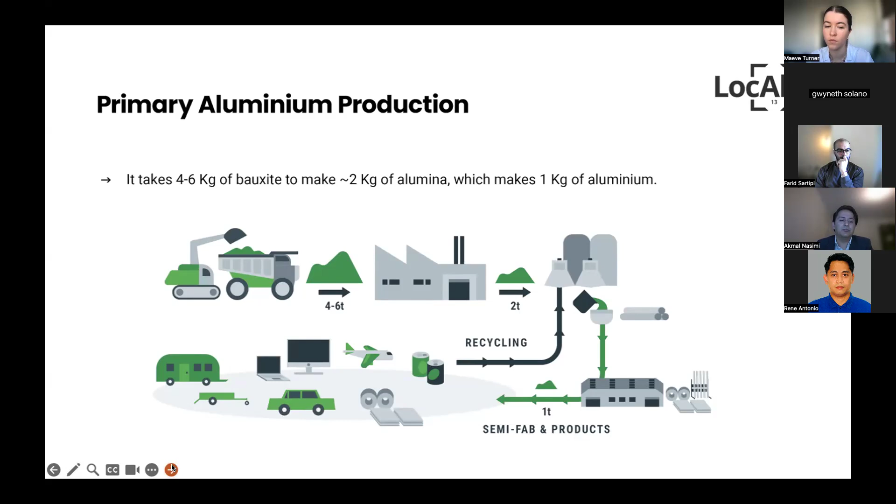Aluminium smelters use an electrolytic process to extract aluminium metals from alumina. It takes about 4 to 6 kilograms of bauxite to make 2 kilograms of alumina, which makes 1 kilogram of aluminium. Most of the energy required is at the smelters process.

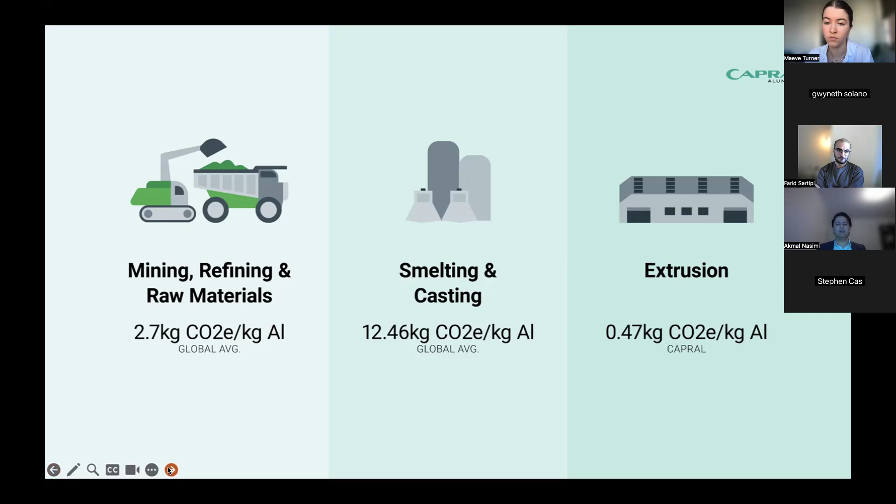In fact, Australian smelters use about 10% of the Australian electricity grid. We only have 4 smelters in Australia, and we are already using 10% of the grid. That means the rest of the cities, factories, everywhere else around Australia only use 90% of the electricity grid. So it's a very, very heavy process when it comes to electricity usage.

There are currently 3 options for aluminium extruded here in Australia: standard extrusions, global average, 12.46 kilograms; LocAl Green, which we're offering as a standard into our building systems market at no extra cost, 8 kilograms; and LocAl Super Green, offered at 4 kilograms. Only until recently the global average was hovering around 16 kilograms.

That 12.46 figure is the result of recent efforts of everyone around the world working towards a greener aluminium product, and that's dropped from 16 to 12 already. So we're heading in the right direction, and Capral obviously is part of that.

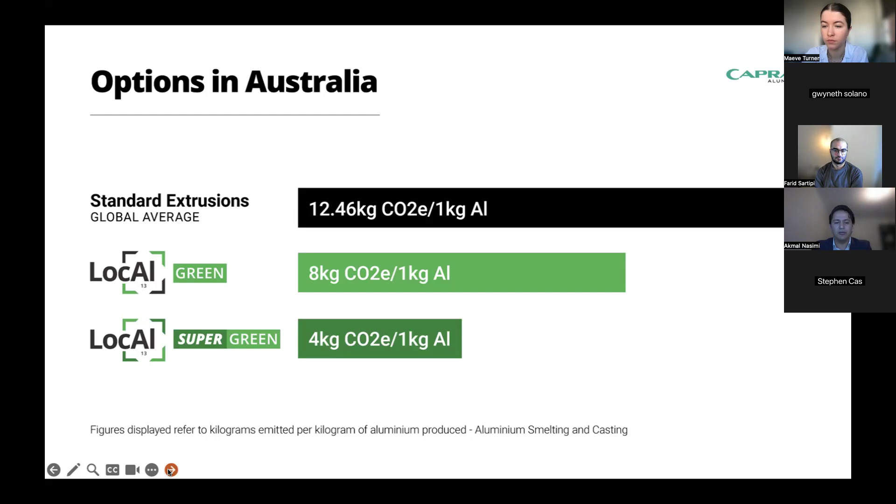Why is it important? We all know aluminium is a critical enabler in a carbon-constrained future. It's got properties of strength, ductility, and lightweightness. It supports development—most of the projects I work with architects on all require some sort of aluminium.

If it's not in the glazing portions, it will be within the building. But if you look at the top 3 products when it comes to carbon content or CO2e, aluminium tops that list by quite a lot. Steel, PVC, everything else is a lot lower.

So it is important for us to ensure we make a move in the right direction and work towards a greener future, I guess. So let's see what can be done about it.

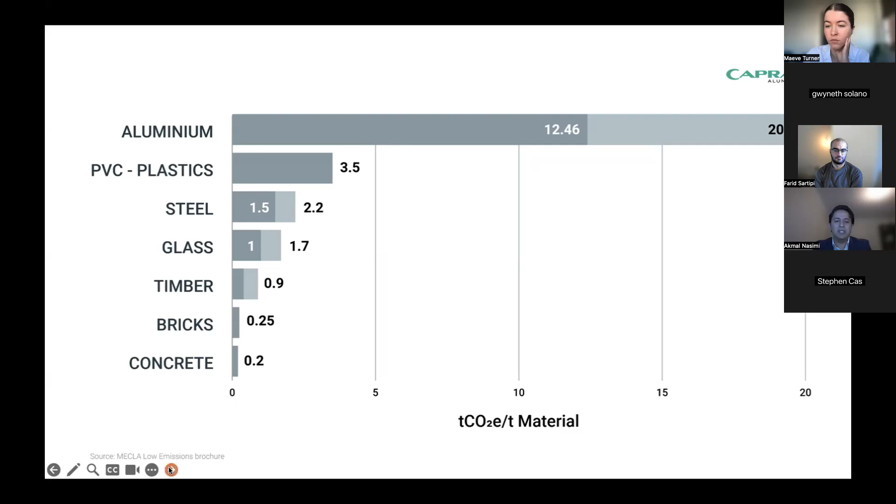So the new release product into the market is still a little slow for people to understand exactly how that's reduced. There's certain worries that the product will not have the same qualities. As mentioned before, and you will see in the next slide, a little short video, the product itself, the strength and everything is still exactly the same. It's the process that reduces that carbon content.

I'll let you watch this little short video and then we'll go into a little bit more detail.

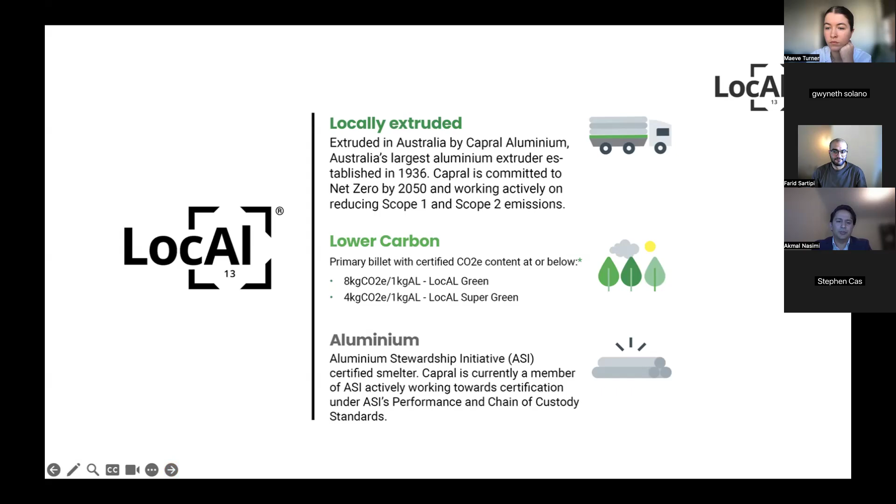If we look at the next slide, when you choose LocAl, you are making a cleaner, greener choice for the future. But as I mentioned before, how do you know that claim that we are providing 8 kilograms and 4 kilograms is true? That's where ASI jumps in, Maeve.

If you could just jump onto the... So Aluminium Stewardship Initiative and Chain of Custody is a very important part of this brand. Basically, ASI drives responsible production, sourcing, and stewardship into the global aluminium value chain. ASI certification provides a whole of supply chain platform for the responsible sourcing of aluminium.

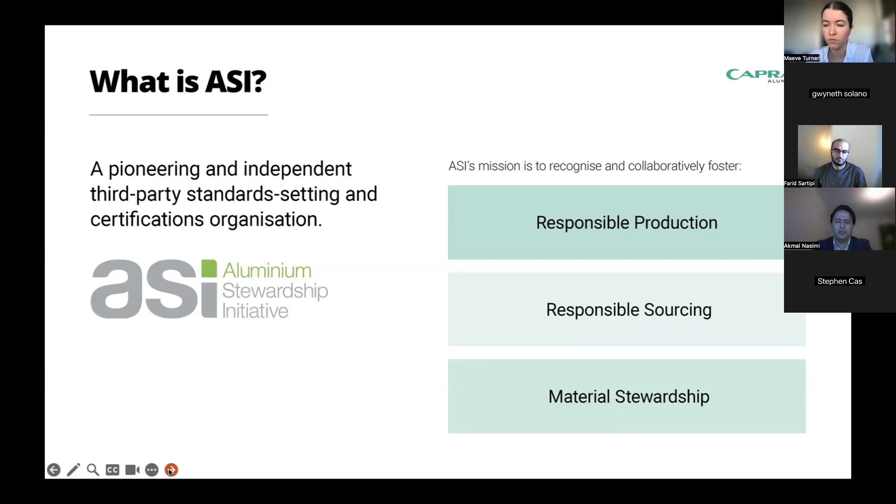I'll go through each one of those separately, but within ASI, you're pioneering independent third-party standards responsible for production, sourcing, and material stewardship. It's easy to state carbon content values for a product, but it needs to be verified by someone independent. And the ASI initiative is all around the world, and organizations can go through this process.

So there's two parts to it. ASI certified performance. This performance sets standards, practices for sustainability and human rights principles to be applied by companies. And there's ASI chain of custody, where every company or every part of the process is linked, and if a factory is not part of that ASI chain, then the final product falls out of the LocAl brand or low carbon brand that could be offered.

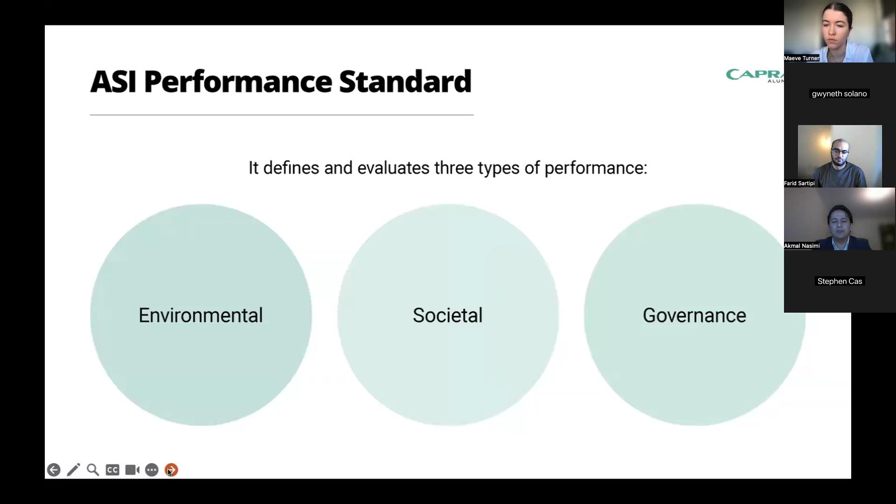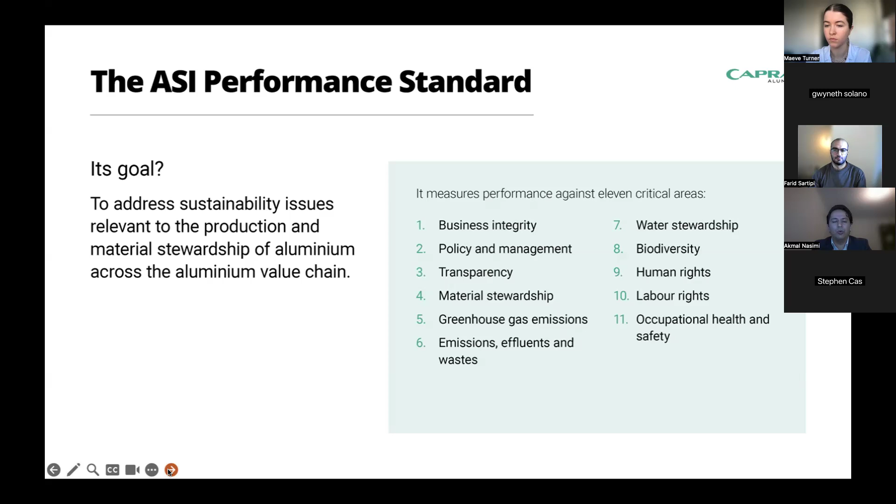ASI performance standards define the environmental, societal, governance side of things. So if we look at the next slide, the goal is to address sustainability issues relevant to the production. You're looking at everything from business integrity, policy management, emissions, water stewardship, human rights, labor rights. All of that is monitored by the performance standard side of things. So this body comes within and makes sure that at every stage of the production process, you're meeting those requirements.

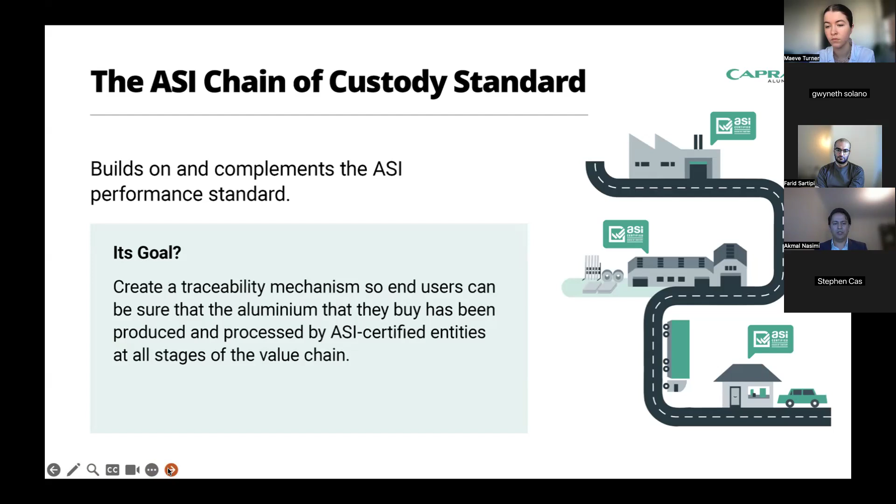If we are purchasing our billets as ASI certified, we as Capral need to ensure we're meeting the ASI requirements, as mentioned in the previous slide, to keep our ASI certification so that when we are providing the material to fabricators into the market, and they are using it on building sites and stuff, they can claim ASI if they are also signed off and ASI certified. If at any point we lose our ASI certification, obviously they will not have that. So it's very important for the link to stay connected.

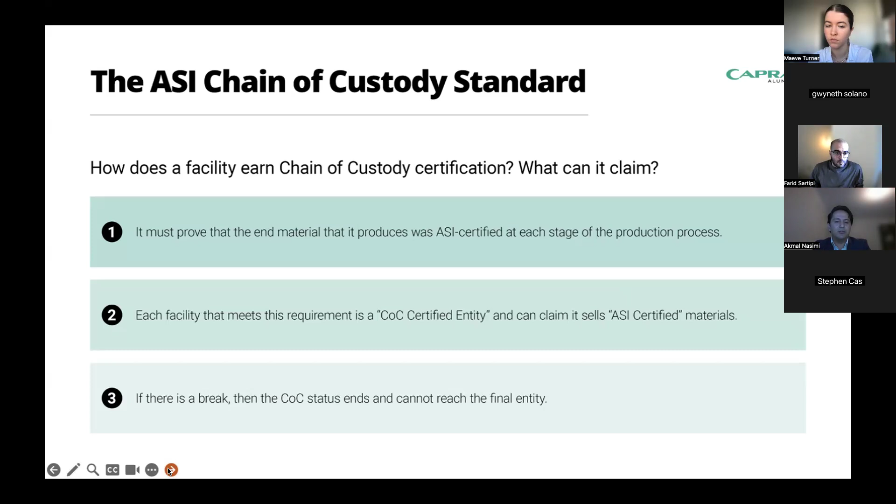So how does a facility earn the chain of custody certification? It must prove that the end materials it produces was ASI certified at each stage of the production process. Each facility that meets this requirement is a COC certified entity and can claim it sells ASI certified materials. If there's a break, then the COC status ends and cannot reach the final entity.

So the good thing is Capral has become part of that, and we can provide into the market low carbon, or low cal, green and super green ASI certified products. So always keep the ASI in mind. And as such, you're getting a much better, cleaner product for now in Australia nationally, at no extra cost basically. So that's about it for my presentation.

Hi, how's everyone doing? Good morning. I don't know if you guys are aware, I'm actually in New Zealand, not in Australia, so we have slightly different requirements when it comes to getting 3D printing off the ground. A little bit of quick background about myself: I'm originally from Egypt, I have a degree in architectural engineering. In Egypt, architecture is inside the Faculty of Engineering. I worked in Dubai, China, New Zealand, and the United States as a project manager, and recently as 3D printing consultant.

One of the major challenges that we have with the construction industry overall is that our productivity is very low. That's one of the reasons why I started to look into automation, because when I moved to New Zealand in 2015, I found that I'm facing the same problems overseas that I'm facing in New Zealand. No matter where you are, you have the same problems: labor and very tight programs, choking points in the supply chain, and we're doing the same stuff all over for the last 30 or 40 years. I have 3 graphs there.

The top one is done by The Economist and was based on research that was done by McKinsey and Co. You can see the productivity, global productivity of the construction industry around the world, is one of the lowest in the economy. So it's way lower than manufacturing and way lower than the average.

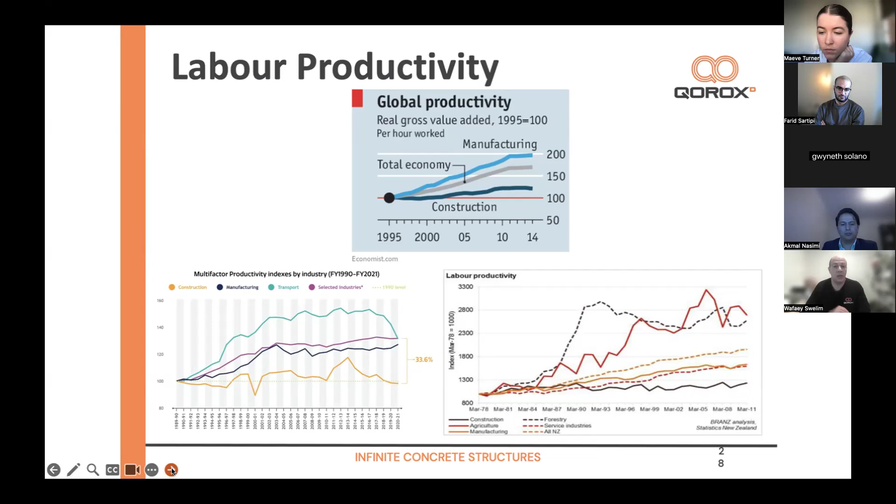So why are we like this? Because the construction industry is a very funny industry. When there's a boom, nobody has time for innovation, and when we're in a bust cycle, nobody has money for innovation.

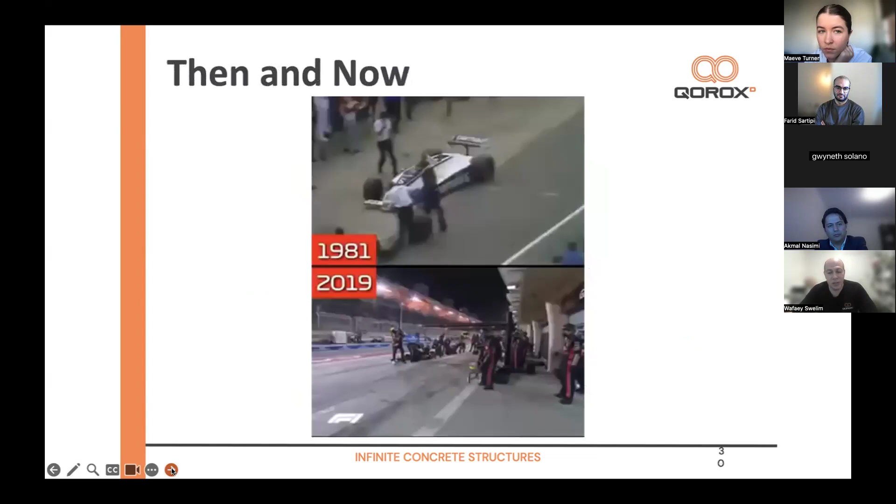This just shows people the difference that happened in Formula One from the 80s till now. It took under 2 seconds for a pit stop in 2019, comparing to 30 seconds in 1981. So the world moved quite a bit, but the construction industry is still stuck.

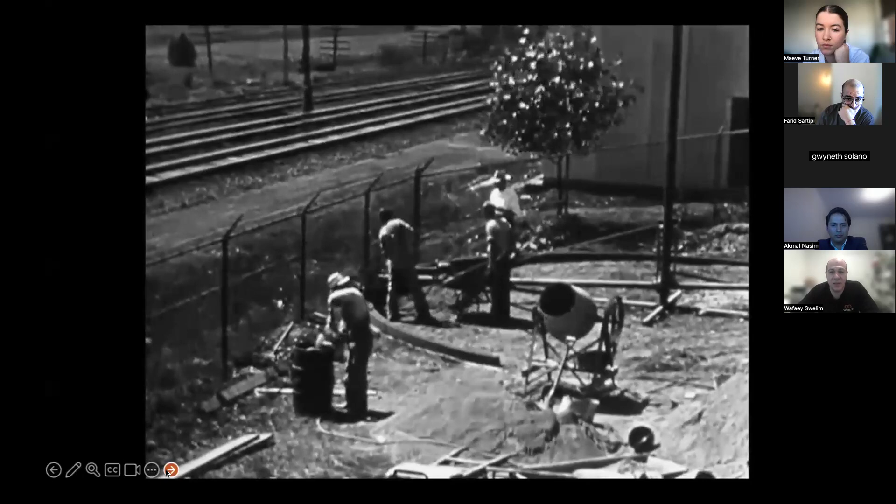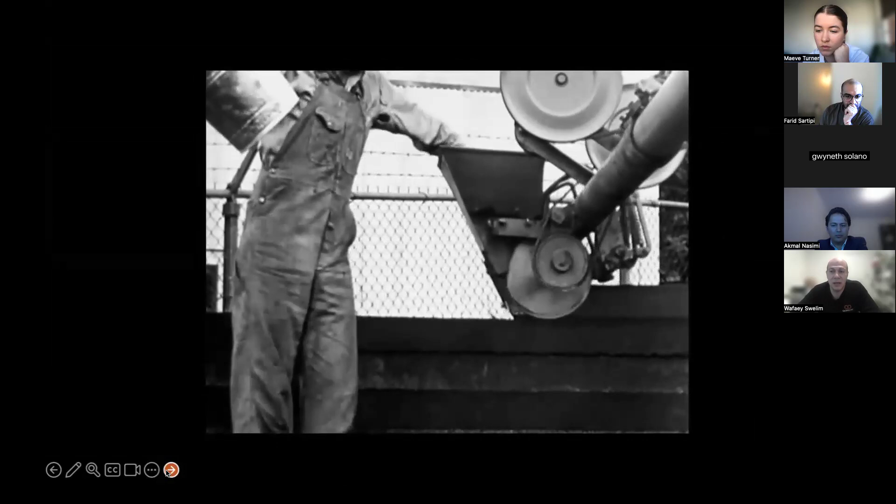This was a video of guys in 1936 using a curbing machine, putting layers on top of layers, doing on-site mixing, and they were building bunkers because they were worried that the Nazis would invade the United States. This was 1936, and all of the patents expired in 1965, so it's almost 100 years old.

But it took a very long gap, same as electric cars. 3D printed concrete, and concrete overall, has a bad reputation for being extremely harsh on the environment.

But we did the life cycle analysis comparing an actual house using 3D printing concrete, or using timber, or using lightweight steel frame. This was done at the University of Auckland, and it was peer reviewed in an Engineering Journal in Switzerland, and it's published. We found that over the life cycle, a 3D printed house is actually better than timber.

Predominantly timber is a lot better, but you will see at the end of life of timber, this is where it goes down quite badly, because what ends up happening is that the timber does not get recycled. Concrete gets crushed and used as drainage metal or used as aggregate again, but timber, all of it goes into landfill.

There's also other hidden advantages of low cost of ownership and heating and cooling the house. Concrete houses have 18 to 20% more efficiency because of the thermal mass that they have, and they require a lot less maintenance.

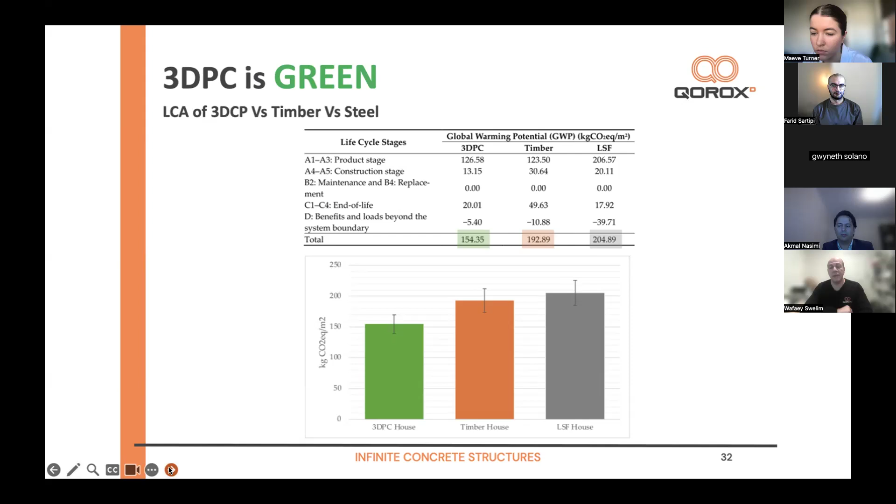But I know in New Zealand and Australia you'll not be allowed to do this because you need to have thermal breaks, and you will need construction joints every 6 to 8 meters depending where you are, and you also need to be covered because it doesn't rain in New Zealand or Australia - it never floods, it never rains, we're continuously very dry.

Now, I'm being sarcastic here, but it's very common in countries used to having canopies over the construction sites, especially in Europe and North America, because in winter it's so cold, so they're used to having canopies actually to heat up the construction site.

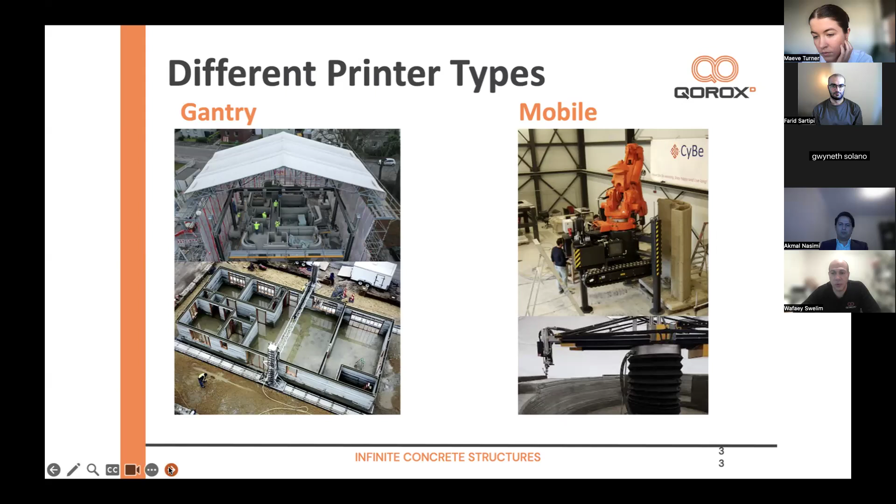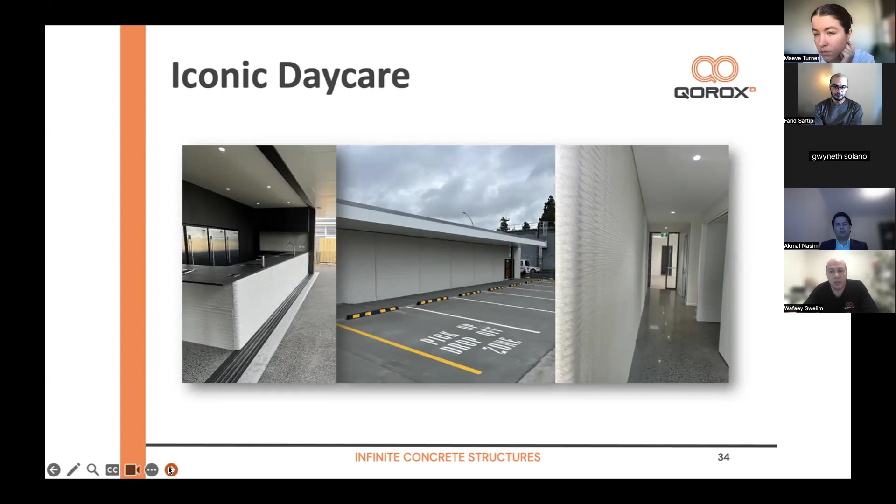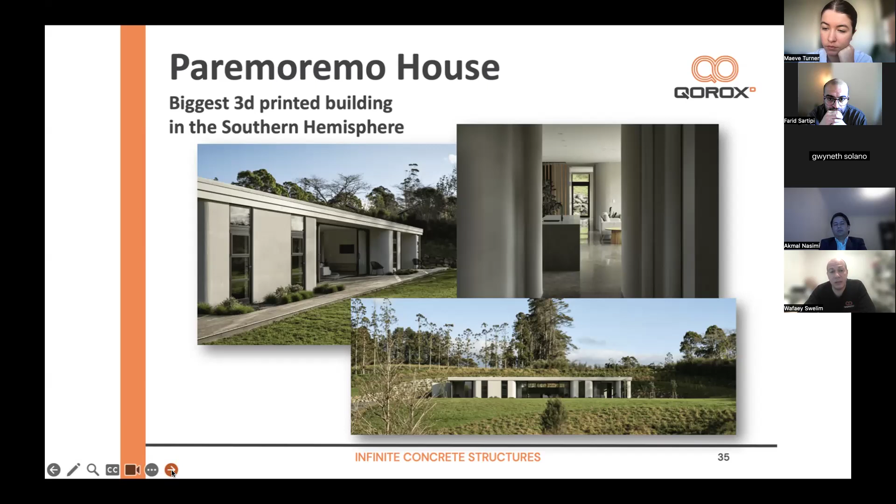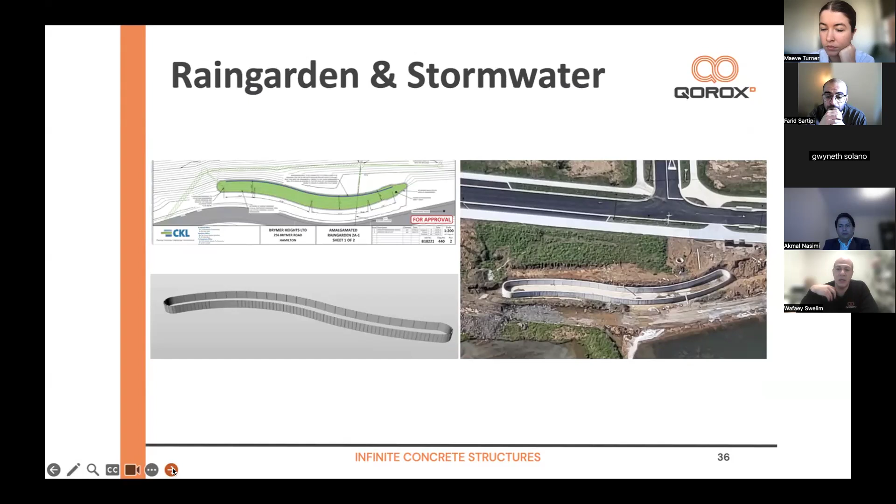Another thing is infrastructure. We printed this stormwater collection system. In New Zealand we use something called rain gardens, which is effectively this big snake-looking manhole. It retains the water before it goes to the wetlands, and it gets filled with media and plants, and the plants and media absorb the water. So you have less overflow going straight into the wetlands rather than just flooding it.

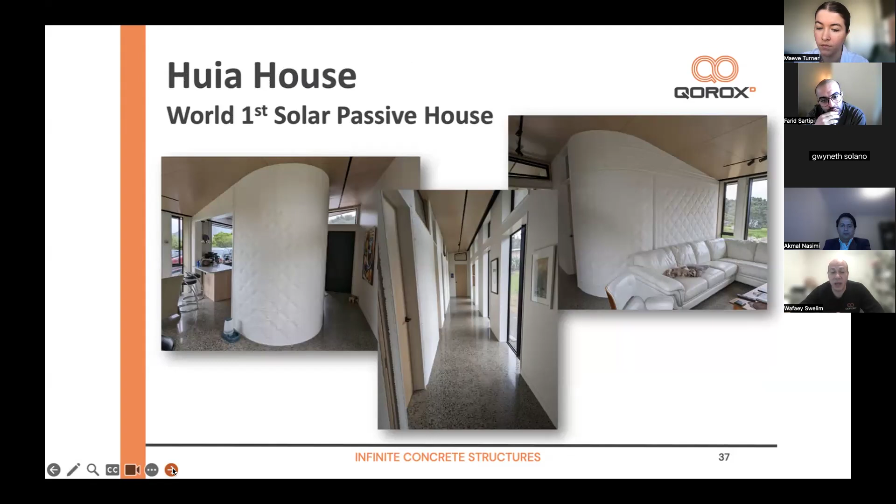This is a world-first solar passive house to have 3D printed walls. This was done for a client in Auckland, and Duncan Perth is the architect who worked on it. Initially it was designed as masonry or cement blocks, and it was replaced with 3D printed walls because you can get the texture. The client wanted something different, and this was really our first house that we had any walls in, in 2022. It was an easy swap.

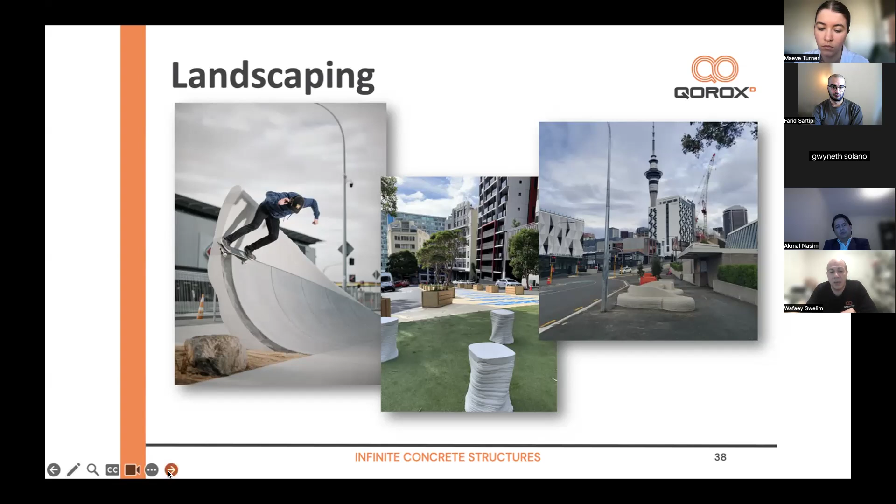Obviously you can do a lot of landscaping elements with it. We've done a skate park in Tauranga, and seats for Hamilton and Auckland Council. The 3D printers give us an opportunity to use recycled waste material as bulk fill inside the seats. The seats on the right have waste material embedded in them, same with the small seats in the middle, which were part of a street upgrade project. Each seat was printed in 2 minutes.

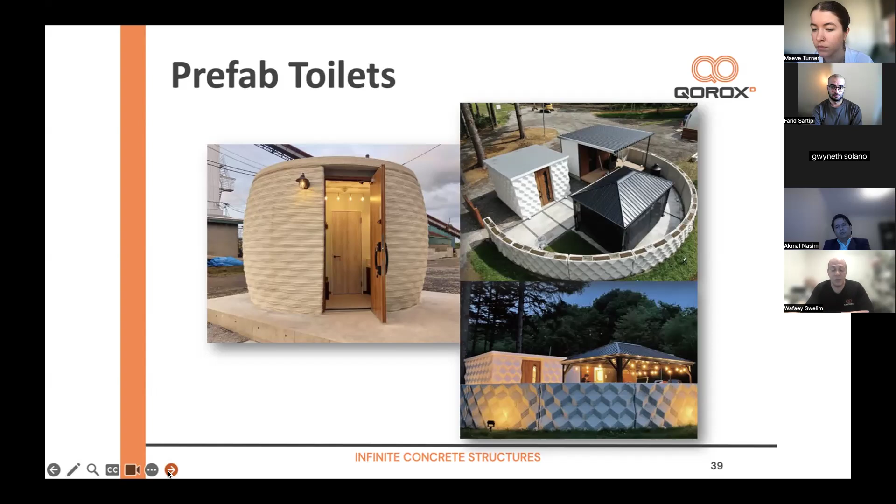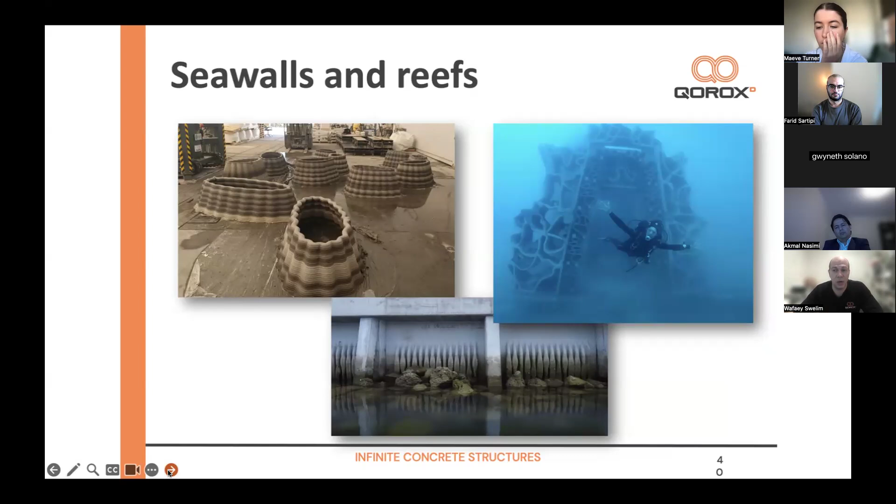I know Australia and New Zealand have a massive issue when it comes to sea levels and flooding overall.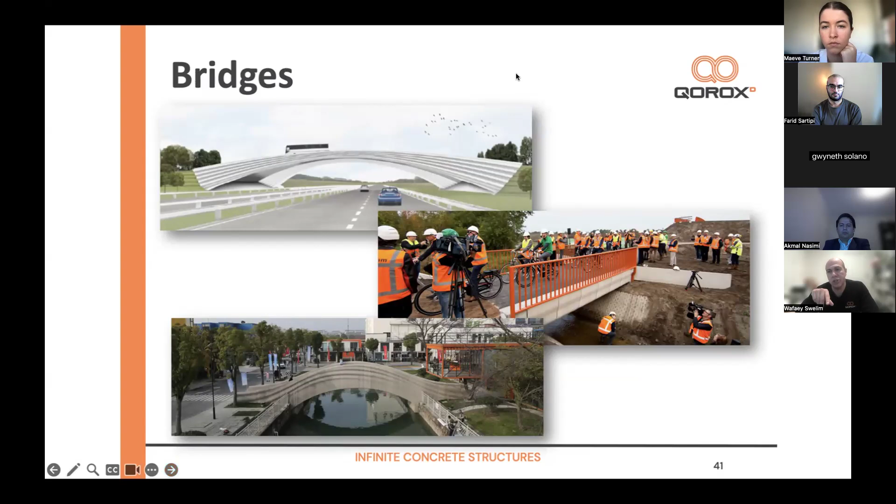Everything else you see here is not done in New Zealand. The one on top should be under construction in the Netherlands—a highway flyover, heavy duty. The one in the middle is in Eindhoven, a cycling lane, and the one at the bottom is in China. All three potentially use similar systems—the top two use post-tension cables, and the bottom one is effectively cladding.

That's it. There's a very quick video that will explain how the whole thing works. The company is called Qorox, and this is our demo video.

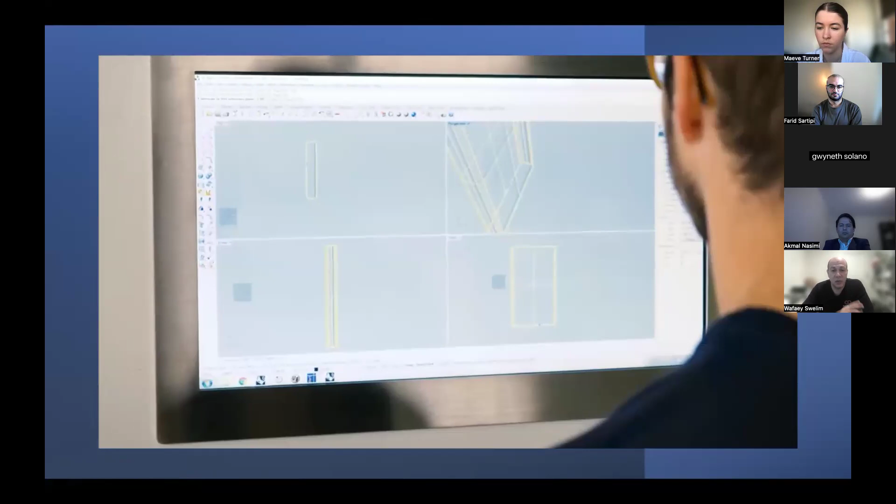The robot generally only needs 2 people to control it, and they don't need to be builders. They're effectively trained as machine operators, which helps us with the shortage in workforce.

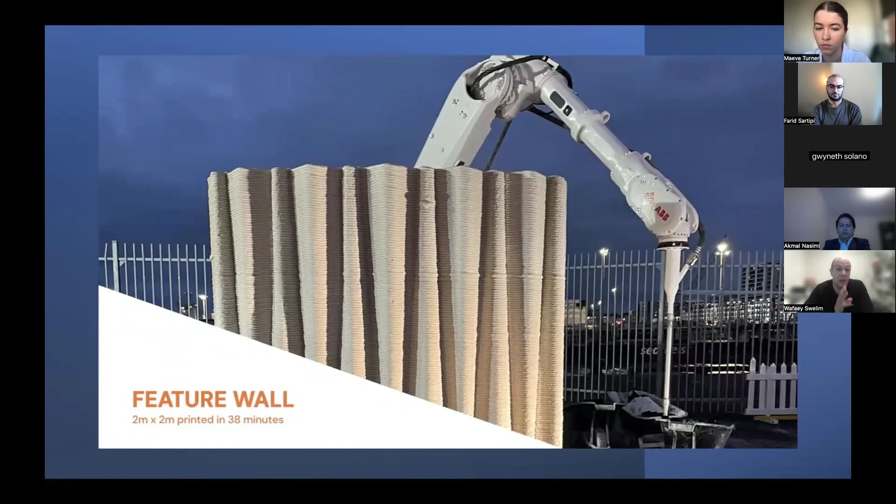There's an architecture website called ArchiPro. We took the robot to the viaduct in Auckland, where they have the America's Cup sheds, and we printed these walls.

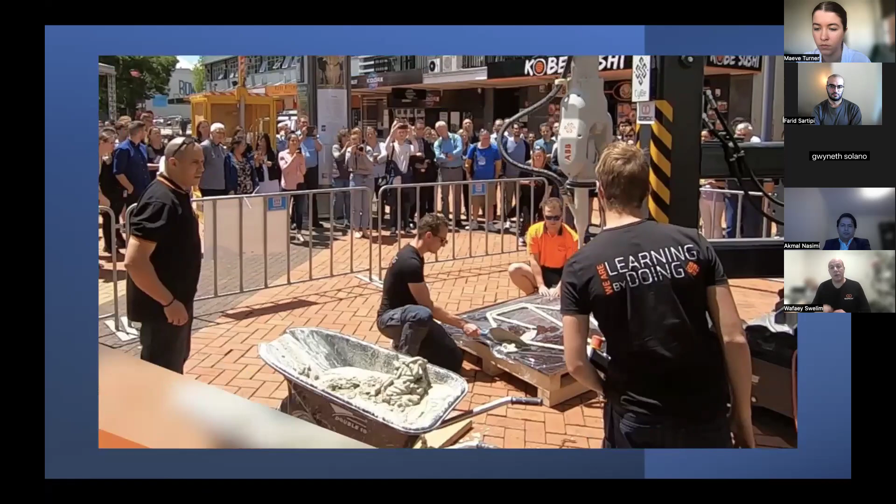When we got the robot in 2020, Hamilton Council was our first customer, and we printed seats for them in a public demonstration done in the middle of town. By using a honeycomb shape, we can use 80% less concrete, and right now they're sitting next to the river.

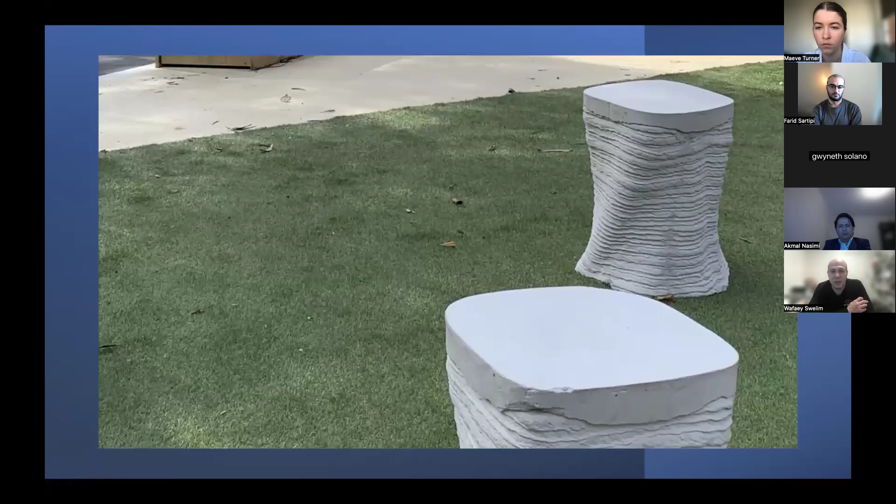And this is our first little wall that we ever did. It's not a big feat, but it just shows another use of the 3D printing. These were the seats that were printed, and right now they're sitting in a place called Emily Place in Auckland.

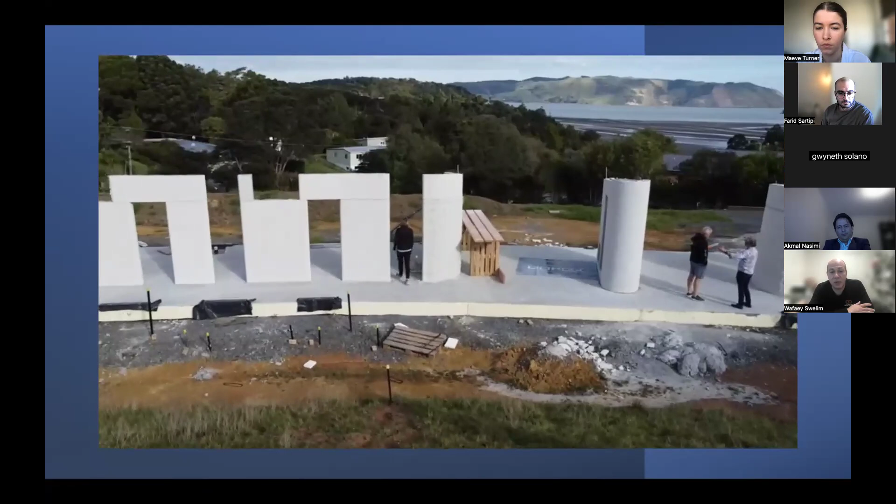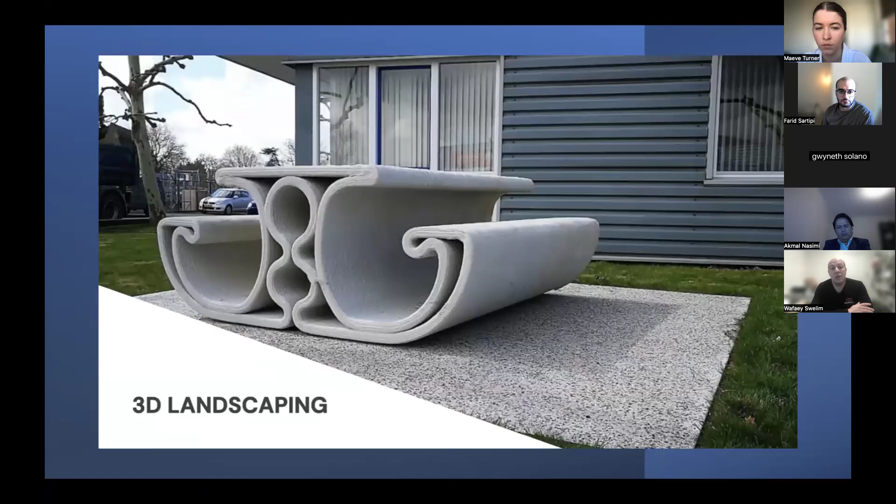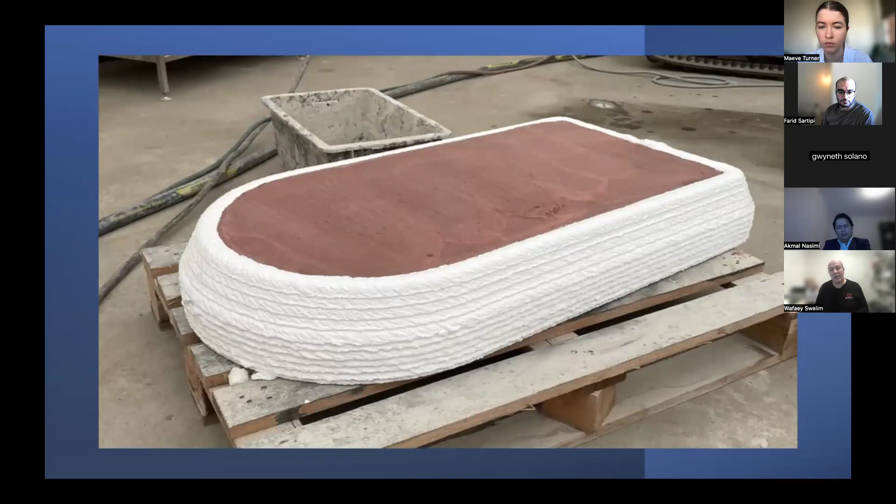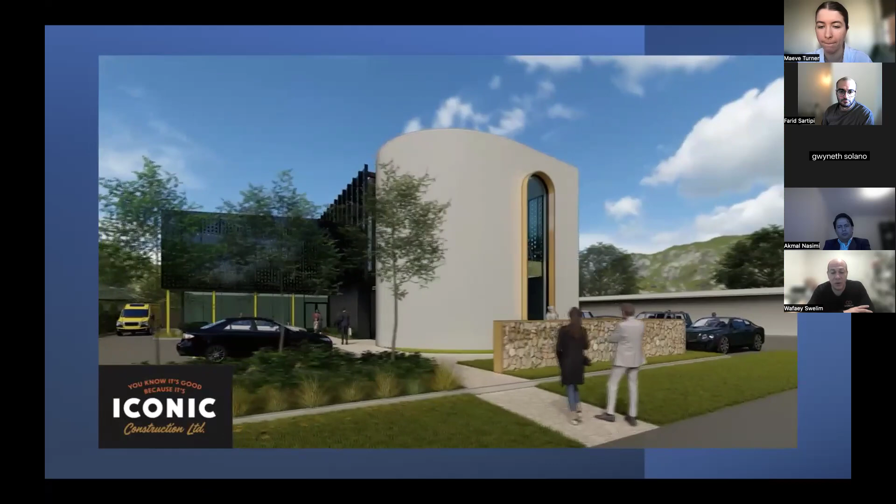And these are the houses that we have in the pipeline or the projects. This is an Airbnb and seating for the music school, and this 3-story house, and previously we had a commercial building. So the point that I was trying to make out of all of this is that 3D printing construction is not just for housing. It's not just for infrastructure. It has massive applications that could be used across the whole construction industry.

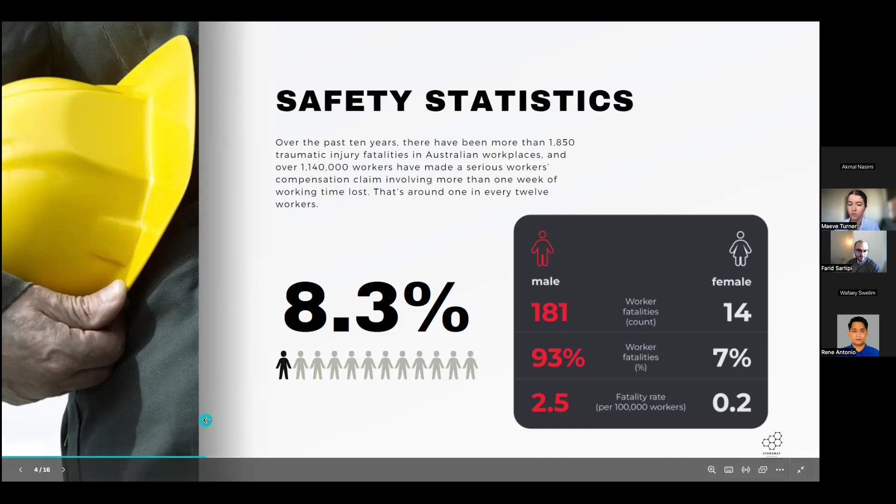A bit of data on the casualties and fatalities in construction: out of 12 people working in the forefront of construction as a construction worker or laborer, one of them would end up with a major disability issue. In terms of demographics, these are the comparisons between males and females in the industry—181 compared to 14—and we also have more than 1 million major serious worker compensation claims. There was a statistic saying that every year there is more than $2.4 billion of insurance claims because of construction related injuries. Just imagine what happens if we can save that money, save lives, and invest that in other areas.

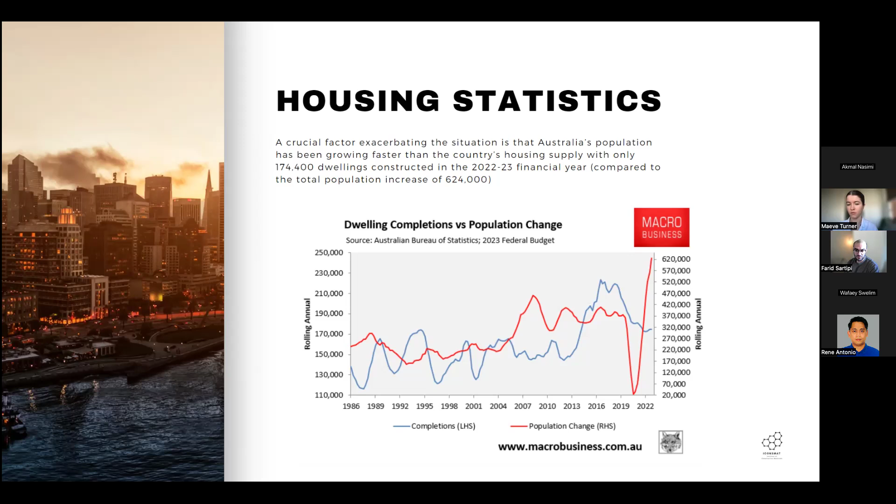Housing statistics and population growth are another push for us to move faster towards automation. These are the graphs we see: the red line is the population change in Australia, published by the Australian Bureau of Statistics, and project completions are on the blue line. In 2020 we had a major drop in population change, probably because of COVID, but then it suddenly ramped up again. Bad news for us—project completions right now in 2024 are way lower than the population growth. That's probably one of the main reasons housing prices are through the roof.

New construction business approach: DIY, do-it-yourself. Most families are getting interested in that because construction costs are high, so everyone's thinking about building it themselves. So if a construction business in Australia wants to take a lead, they must find a way to build these prefabricated elements somehow, and that's how they can do it. Later on in future slideshows I'll show you how to design a control panel. At a basic level you're probably going to need a proper degree for that, but it's going to be an opening in case people are wondering how to start an automation project.

Less labor intensivity would be the benefit. A DIY project is becoming popular, but there is a downturn here as well, as it minimizes the architectural flexibility. So everything would be designed in a cubic way, as opposed to a 3D printed house, which enables curvatures in an architectural design.

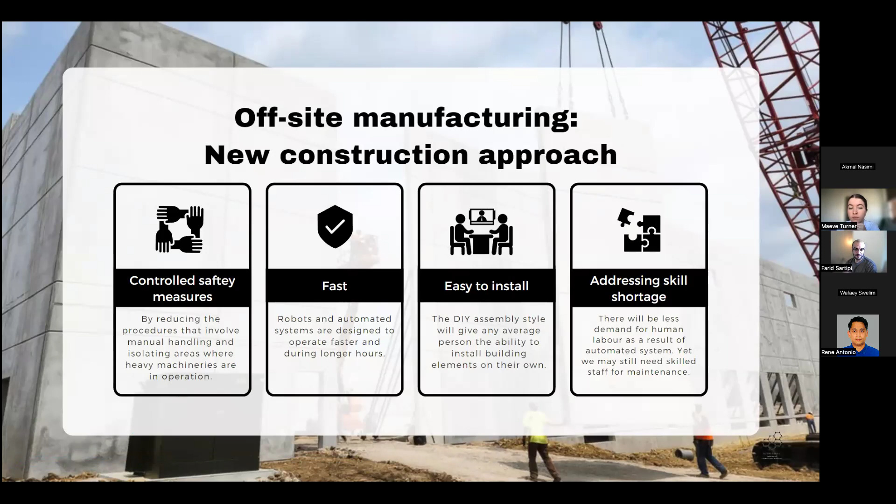Offsite manufacturing will have controlled safety measures. It's faster, it's easier to install, and it also addresses the skill shortages, the labor availability in the market, caused by many issues. So one of the questions I have for our audience, if somebody can help me address this question at the end of the slideshow, is how we can address the architectural flexibility caused by the modular designs in offsite manufacturing.

If you imagine the concrete panels being made, all of them are in a flat surface, fair to say more than 95% of them. So how can we create an automated system that would give the architect a pleasure for the design?

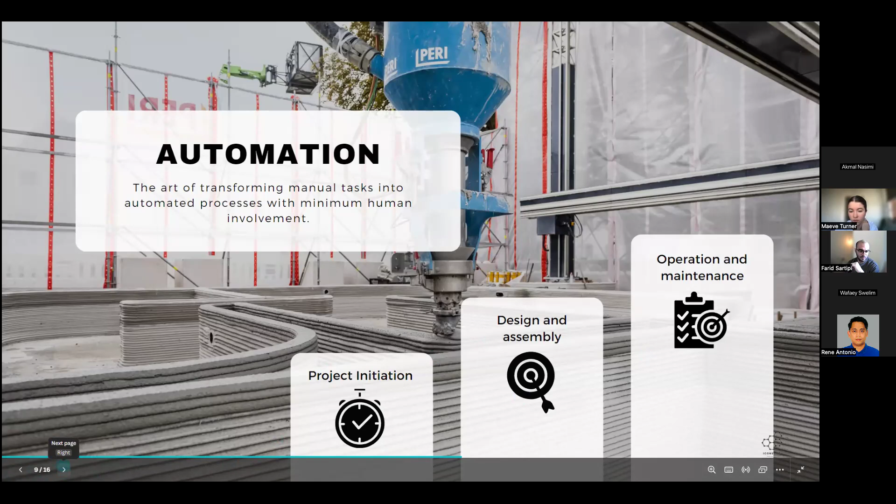Any automation system would have 3 steps: the project initiation, design, assembly, and operation and maintenance. So if you're planning to open up an offsite manufacturing plant, you must consider these 3 steps. Operation and maintenance will probably take most of your budget investment if you're looking at the long-term execution.

That automated system would have, let's compare that with a human body. Any automated system would have a skeleton and a muscle, plus a system that would make the decision - the part that would hold the structural integrity of the automated system. So most of the time they are steel, they don't have any movement. We also have hydraulics, pneumatics, and motors as the moving parts which would mimic the muscles of a human body. The skeletons will be the frames.

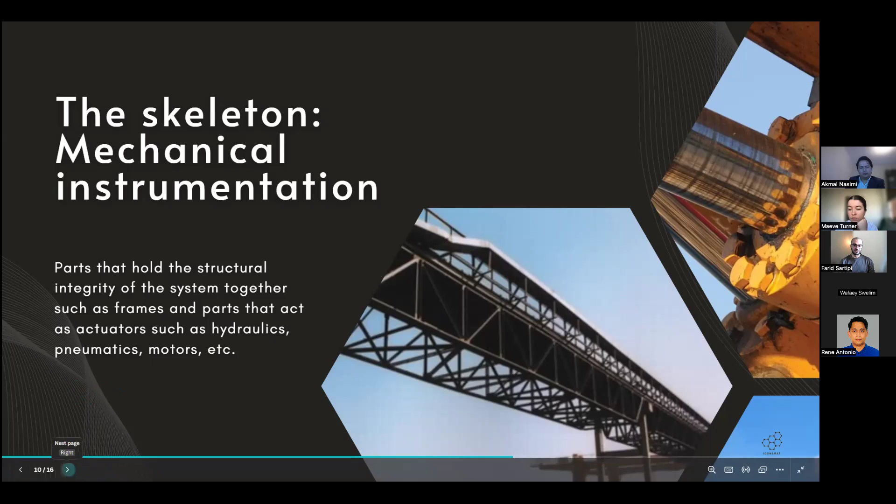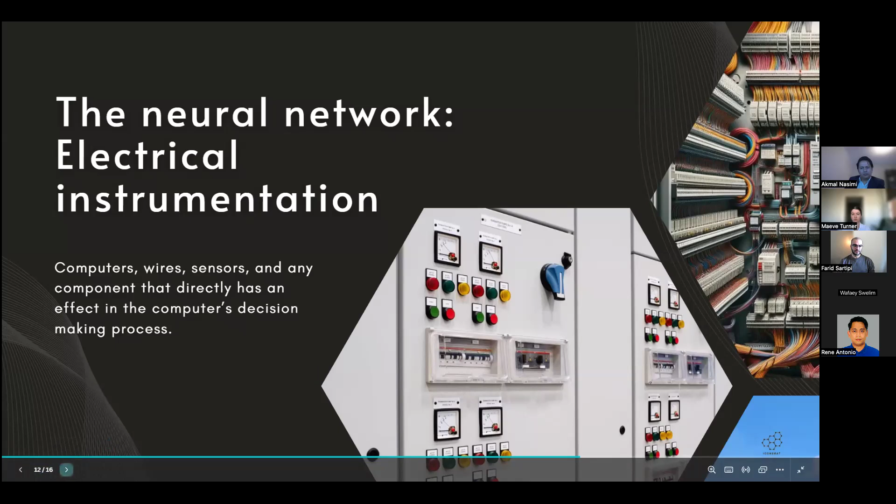For the neural network, the decision-making part of that automated system, we would have these control panels. The industrial control panels are computers and wires, plus the sensors that will make a decision for us. For example, a conveyor belt - you want it to stop rolling once an object is detected at one end, and again start rolling once the object is removed from one end. That decision would be made by something called a control panel, and these control panels have a PLC at the heart of them.

These are the main elements of any control panel. We have the box, or Americans would call it enclosure. The PLC, that's, I guess, the brain of any automated system. Based on the inputs and outputs, this PLC module would decide a movement. We have the DIN rail slim relays that convert.

Okay, so let's move one step back to the PLC. This module is run on a 24-volt DC input and output, but most of the huge elements on site in the factory, they are really energy intensive. So this transition between 24-volt DC to, let's say, 120-volt AC is being done by this DIN rail slim relay. One end of this relay is connected to the PLC, the other end is connected to the actuators on site, plus a few terminal blocks as well.

We also have wires. In terms of wiring, the size of the wires will be determined by the amount of current and voltage going inside the wires.

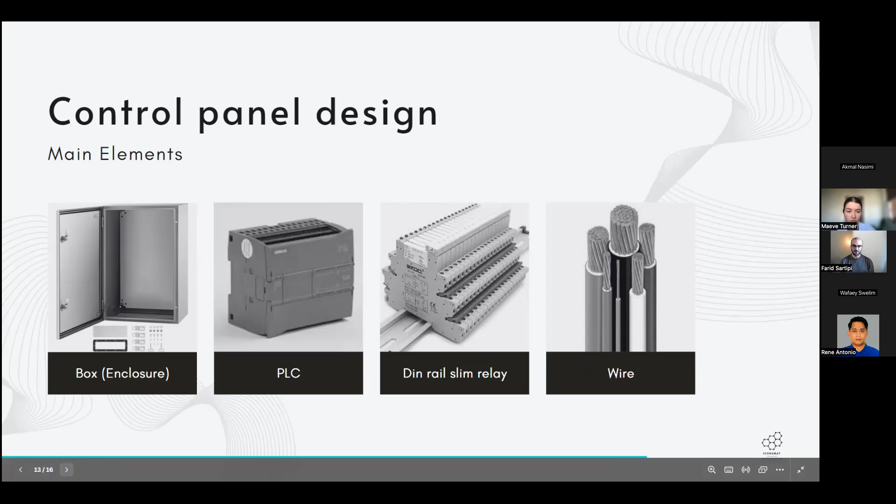For Siemens S7-1200, which was chosen for typical construction automation, you will get inputs and outputs. On the top rail, you have inputs, and at the bottom rail, we will have the outputs. So once a sensor sends a signal into the input part of the PLC, based on the ladder logic program that you've downloaded to the PLC, there's a certain output signal going out to the field instruments. Let's say if a sensor detects an object, you want a motor to start turning on and start rolling.

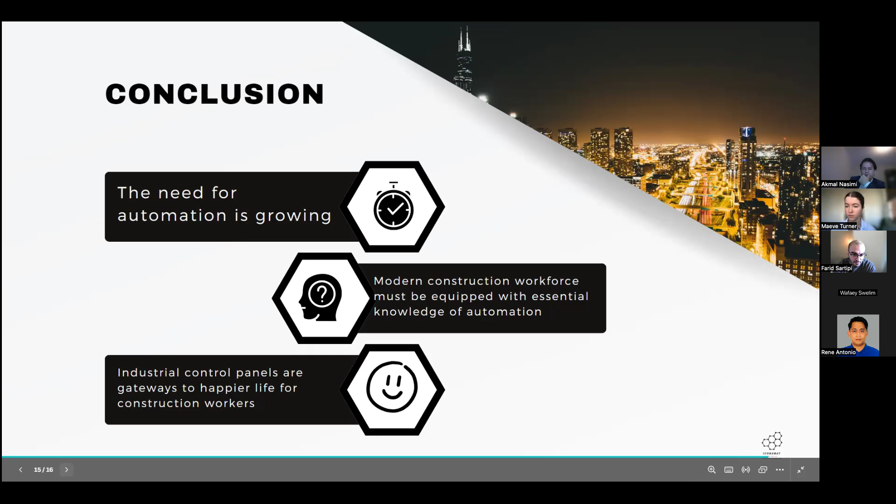The conclusion is we need automation, because let's not be so passive about innovation in construction. There are casualties, there's housing demand going up. So automation is a necessity these days, especially for construction businesses who want to thrive in this competitive market, and industrial control panels are the way to go.